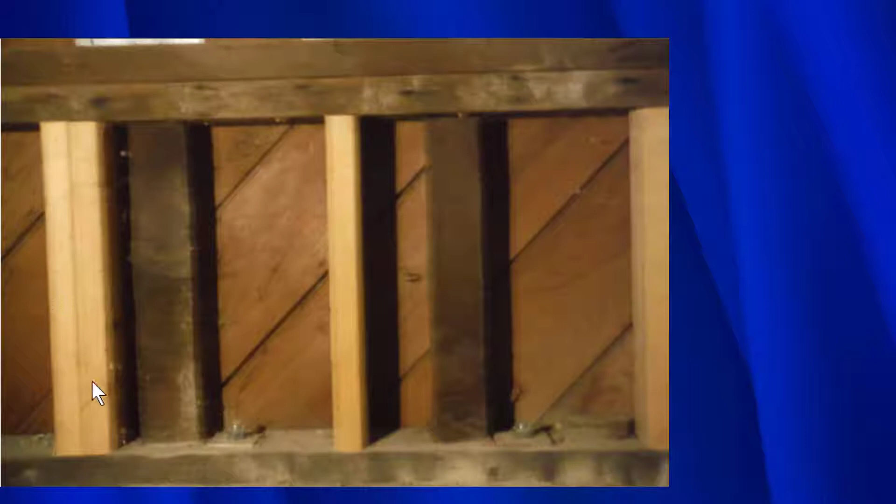So the way you tell diagonal sheathing is you have a wall where the siding is at an angle. So you can see this is the siding, this is the wood siding right here, and it's going at an angle like this. You see another one right next to it at an angle like this, and then it'll be nailed here into the mud sill. Usually 3 to 4 nails go into this.

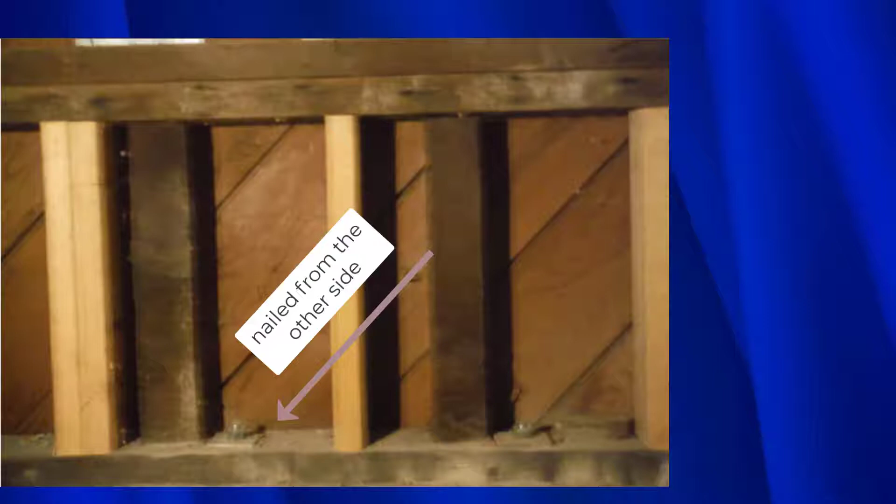And then the great thing about diagonal sheathing is normally we see it along the entire wall. So it'll go way up there. It's not just in the cripple wall. It'll go way, way up high, and it'll be nailed into the top plate right here. So let's go ahead and look and see what the code has to say about this material. It's really surprising how strong it is.

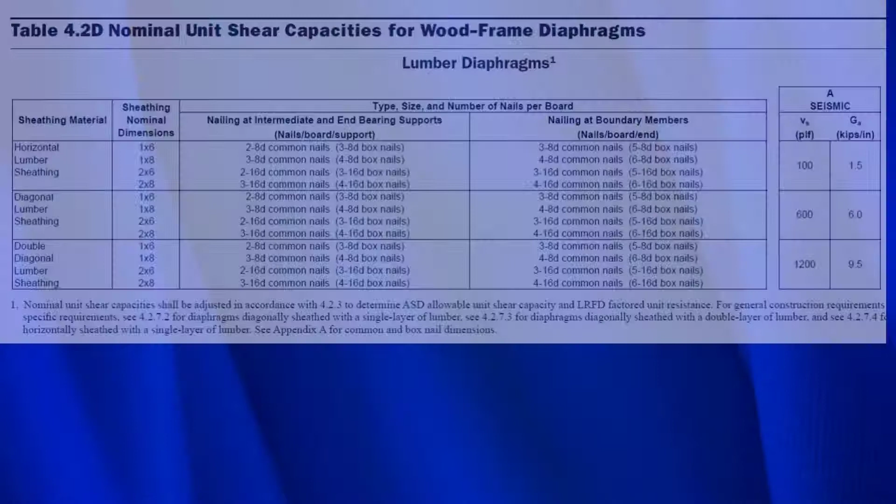But no matter which ones you use and what configuration, and how they're nailed, they're all worth 600 pounds per linear foot. And that's quite a bit. 600 pounds per linear foot is actually stronger than plywood which is nailed 3 inches on center, 3 inches apart, with 8-penny nails. However, there is something where we have to reduce it.

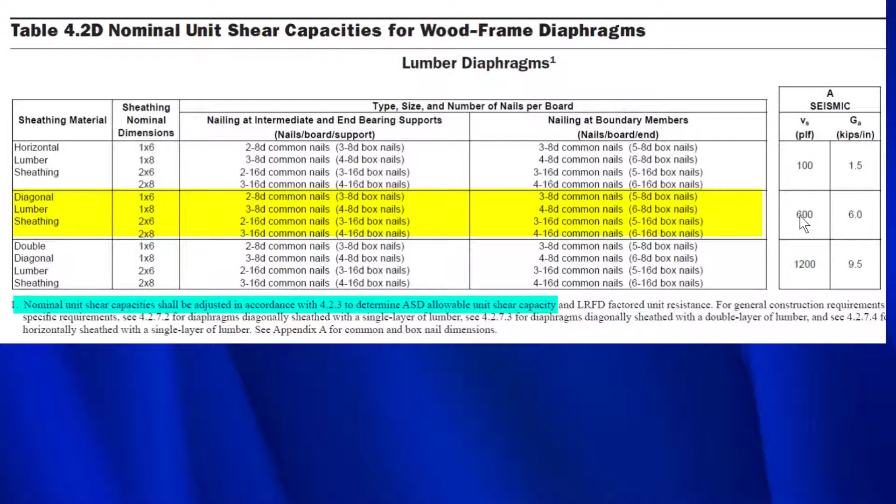And there's a section there that says nominal unit shear capacity shall be adjusted in accordance with 4.2.3 to determine ASD allowable unit shear capacity. In other words, that's the same type of rating that you would find in the shear wall tables. And what that section says is you must divide by 2. So when you look at the diagonal sheathing, this number right here, you divide by 2, and that is your actual rating relative to shear walls.

Now, if you have an entire wall that's braced with diagonal sheathing, it's in pretty good shape. Because in a regular retrofit, you'll usually do maybe 1/4 of the wall, probably at maybe 600 or 500 pounds per linear foot. But if the entire wall already can resist 300 pounds per linear foot, I would put that at the bottom of my list in terms of things I need to do on my house. I'd look at a kitchen remodel or something before I'd look at that.

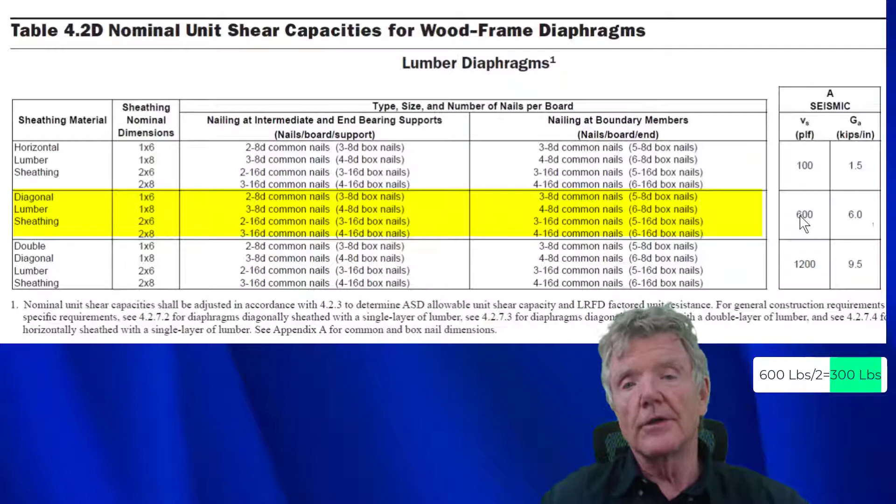Now, the one thing I do want to point out, which is fairly important, is it says right here in the building code for new construction that single and double diagonal sheathed lumber walls shall not be used to resist seismic forces. Now, that's simply because plywood is available. So they're not going to have people putting in diagonal sheathing when plywood would work. Plus, nobody in their right mind would do it anyway because it'd be so expensive. But anyway, that's for new construction. It's not allowed. But overall, it really can resist earthquakes pretty well, and that's something that I would consider.

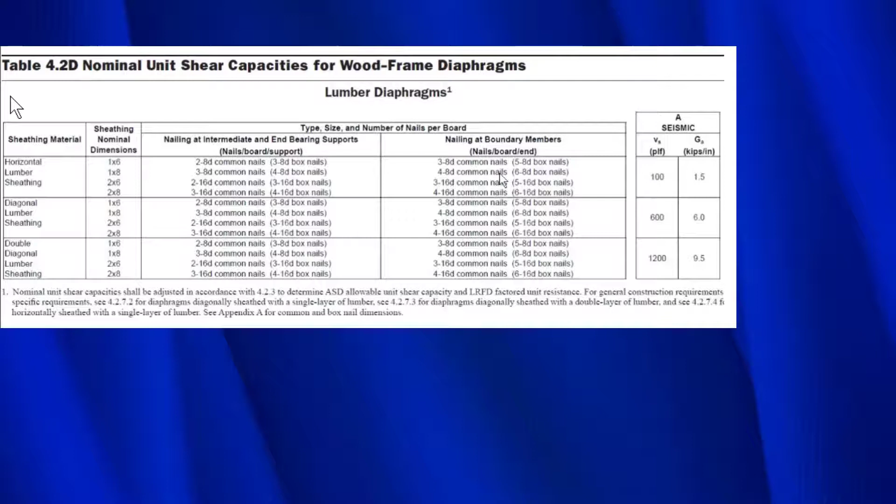I'd like to go back to table 4.2D and show you something important. So you see here where it says horizontal lumber sheathing, that means boards that are just going left to right. You see it all the time. You go by any house, it's made out of wood. If you look underneath the stucco, you'll see the exact same thing. It's just a board that goes left to right and not at an angle, which is what diagonal sheathing is.

So when it's horizontal like that, no matter how big it is, a 2x6, a 2x8, whatever the thickness of the wood, no matter how many nails you put in it, it ends up being only 100 pounds per linear foot. Now, that's why we retrofit houses, because it's so small.

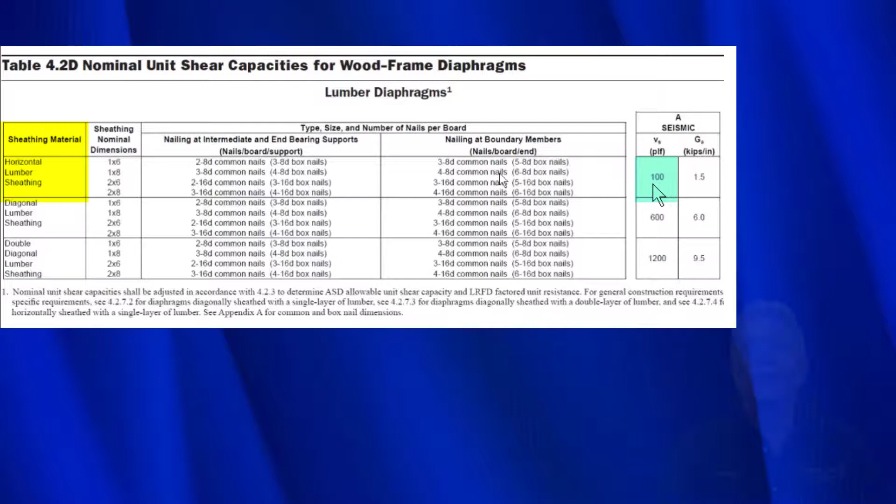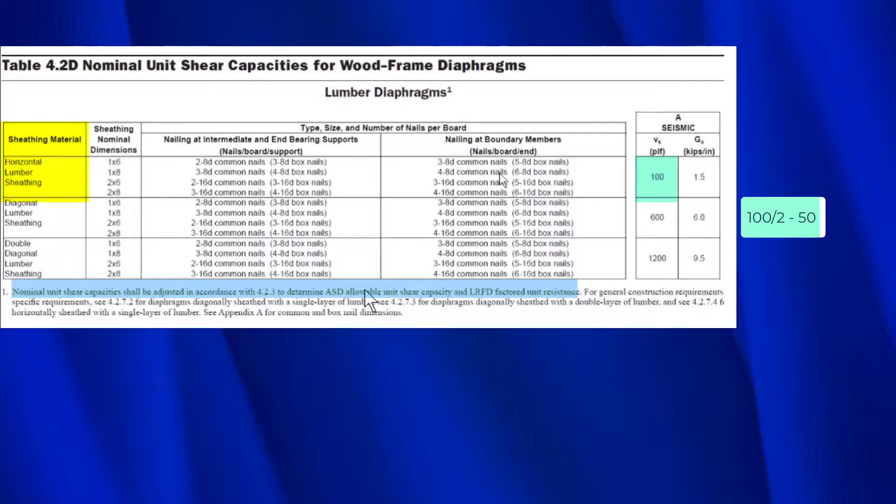Now, if we take that and divide it by 2, like we did when we used this footnote right here, these walls don't have a lot of capacity. You just have the horizontal sheathing, and it's simply not enough to hold the house up. So this is actually the reason that we retrofit a house. This is why we put plywood on a house, because this horizontal sheathing just doesn't have the amount of strength we need.

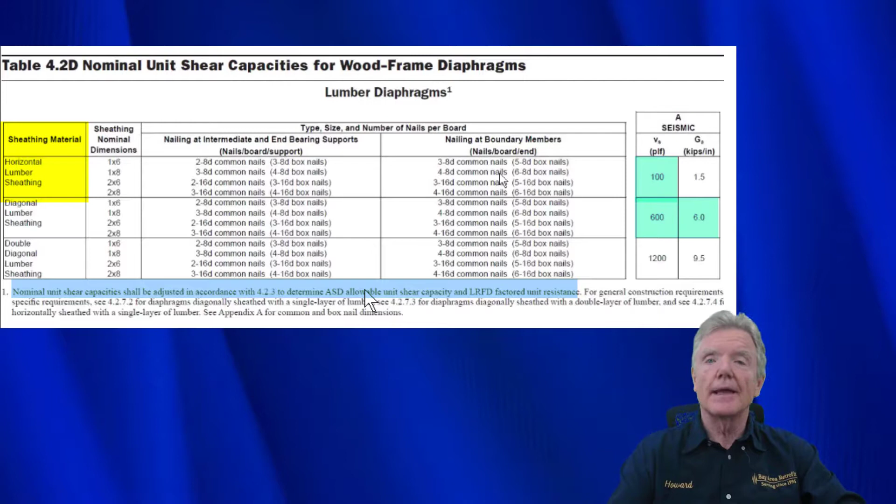So I hope you found this information on diagonal sheathing helpful. If you're doing your house, or if you're a contractor and you happen to see this diagonal sheathing, you may just want to leave it alone if everything's pretty solid. Certainly, if I had a nice long wall with diagonal sheathing, I probably wouldn't even touch it except to put some bolts in.